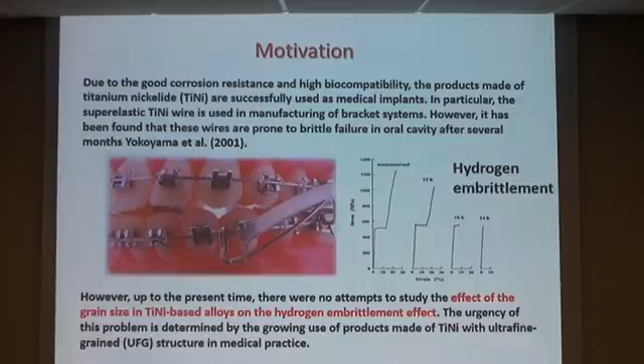However, up to present time, there were no attempts to study the effect of grain size in titanium nickelide-based alloys on hydrogen embrittlement effect. This work is to investigate the effect of hydrogen-induced fracture of titanium nickelide-based alloy.

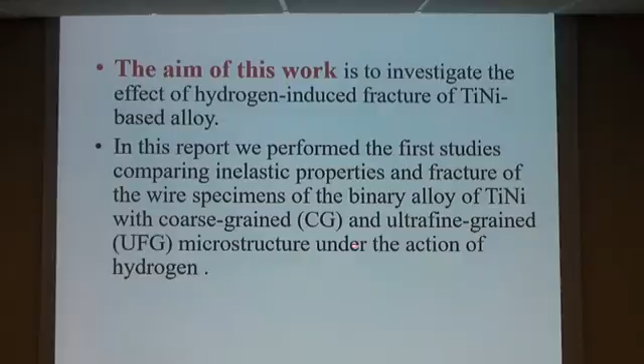In this report we performed first studies comparing inelastic properties and fracture of wire specimens of binary alloy of titanium nickelide with coarse grain and ultrafine grain microstructure under action of hydrogen.

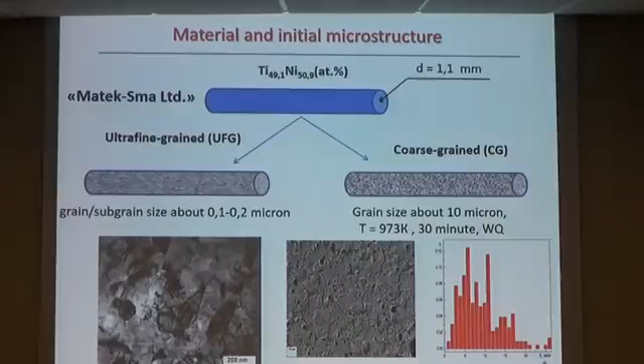Two types of specimens produced by Matek company, composition with ultrafine grain structure with grain/subgrain size about 0.1 micron shown in the microstructure, and coarse grain specimens with grain size about 10 microns, after recrystallized annealing.

Specimens have been charged electrolytically with hydrogen in 0.9% sodium chloride solution, current density applied, charge time was 3 hours. Hydrogen concentration was measured using hydrogen analyzer LECO.

Inelastic properties were determined in torsion test by cyclic loading and unloading scheme under isothermal condition. Scanning electron microscopy was conducted using Zeiss scanning electron microscope.

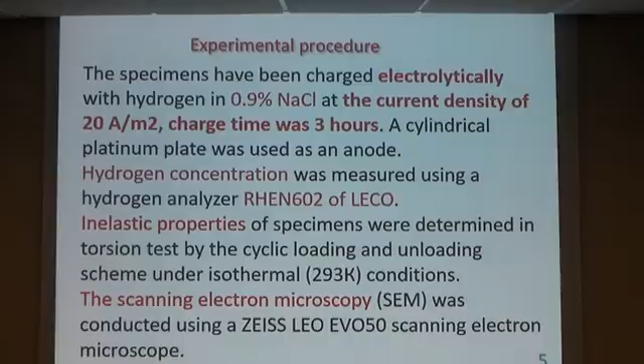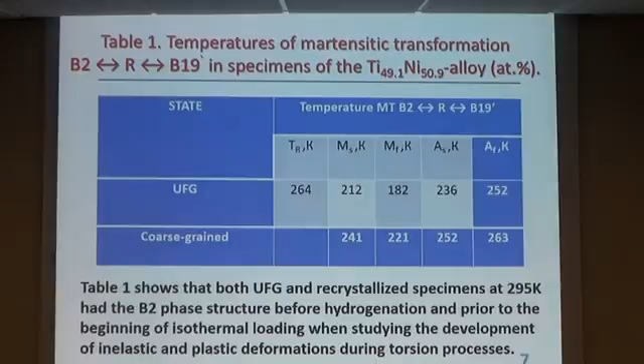Martensitic shear stress about 400 in ultrafine grained and coarse grained specimens. Transition from ultrafine grained structure of specimens to coarse grain results in softening.

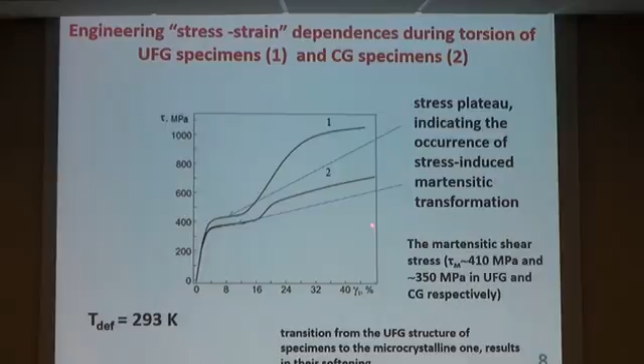Super elastic effect under hydrogen. This is accumulation and recovery of inelastic strain at the first loading-unloading cycle in coarse grain specimens. Testing temperature was room temperature.

After hydrogenization compared to before hydrogenization, the hydrogenated coarse grain specimens achieved the stage of dislocation strengthening earlier as compared to unhydrogenated specimens.

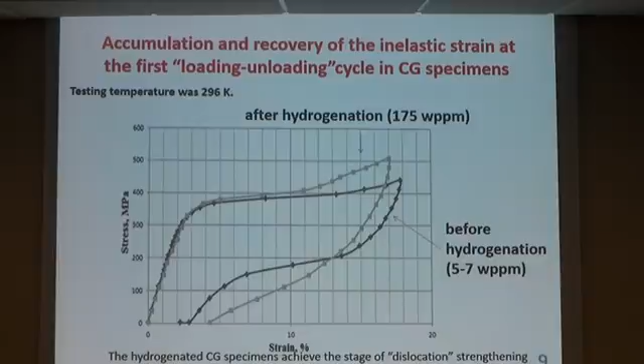It is accumulation and recovery of inelastic strain at first loading-unloading cycle in ultrafine grain specimens. Hydrogen has a weaker effect on the inelastic properties of ultrafine grain specimens than coarse grain specimens.

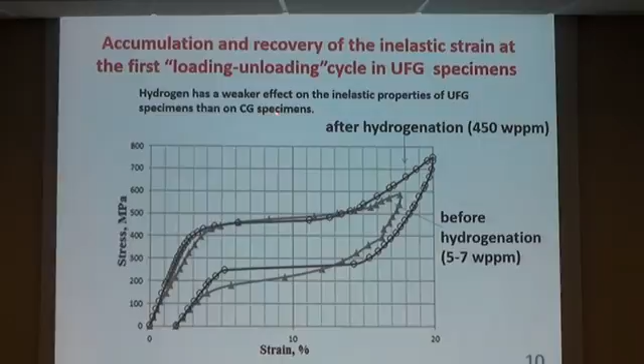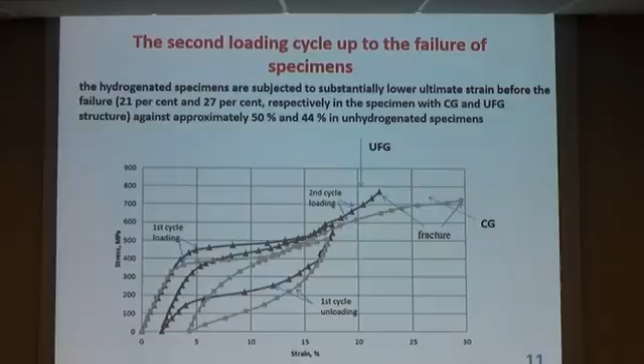Torsion failure. Torsion failures are different from tensile failure. In this case, there is a little localized reduction of area or elongation.

Ductile failure shows a flat surface; brittle failure shows an angled surface.

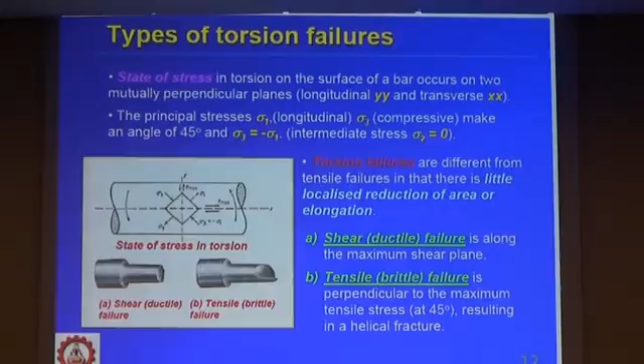Torsional fracture of titanium nickelide wire, without hydrogen. Ductile fracture, flat surface, dimple near center of wire.

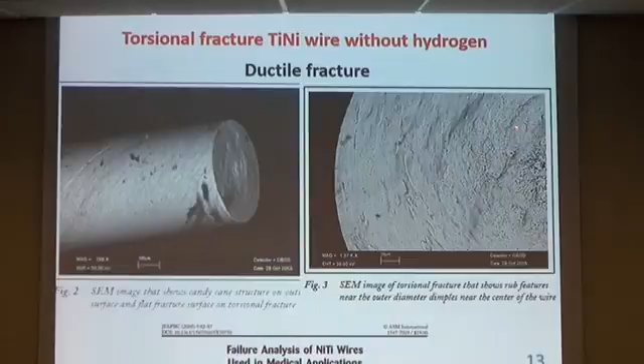It is image of fracture surface of hydrogenated titanium nickelide specimens with coarse grain structure. Brittle fracture, spiral cracks, delta L is the distance between spiral cracks.

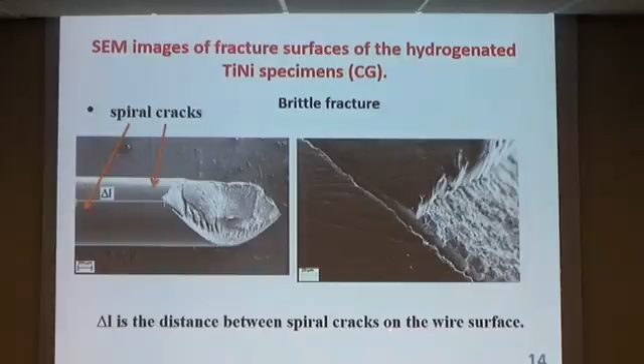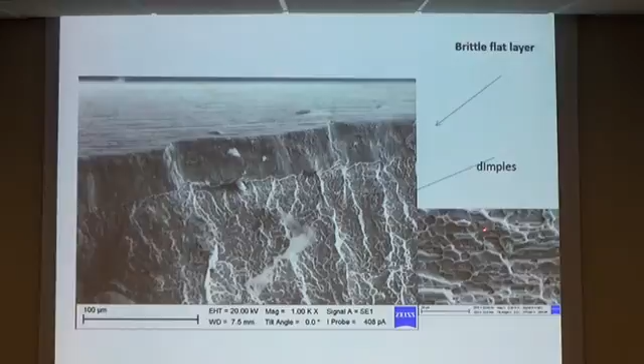It is brittle flat fracture with dimples. Cracks on the surface of fractured hydrogenated recrystallized specimens. Many cracks. Crack width depends on distance of specimens from fracture plane.

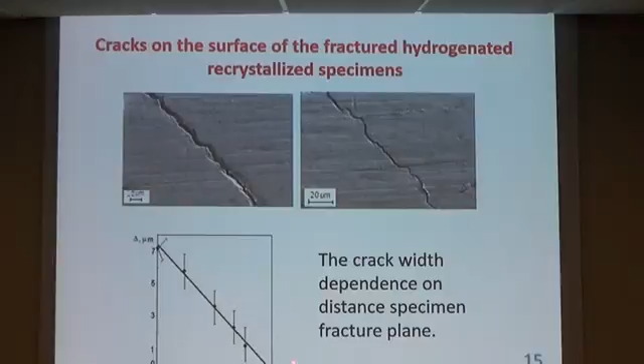It is image of fracture surface of hydrogenated titanium nickelide specimens with ultrafine grain structure. Only one spiral crack, also brittle fracture.

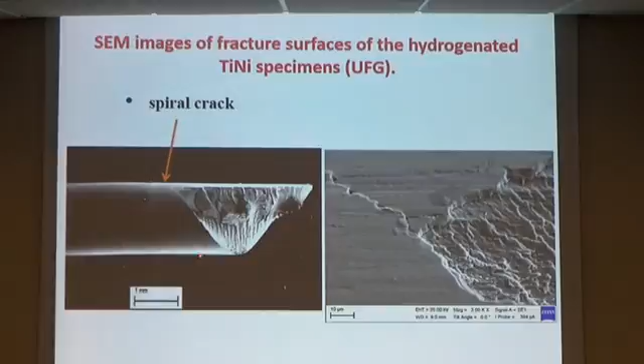In ultrafine grain structure, brittle layer is about 3 microns. In coarse grain structure, brittle layer is about 30 microns.

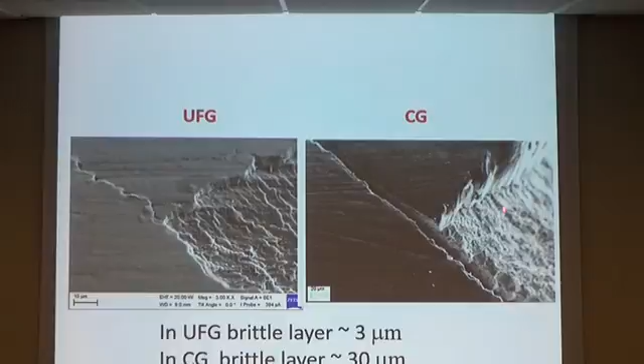600 megapascal. Hydrogen has a weaker effect on the inelastic properties of ultrafine grain than coarse grain specimens.

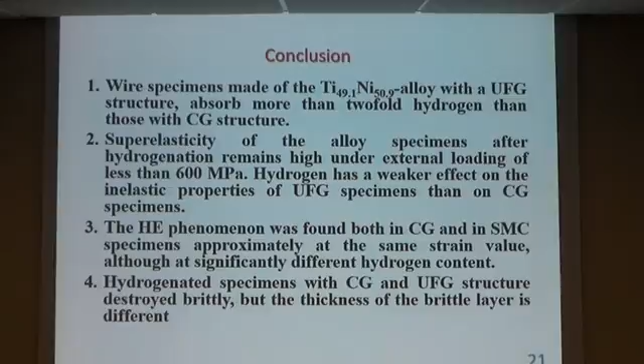Hydrogenated specimens with coarse grain and ultrafine grain structure are destroyed in a brittle manner, but the brittle layer thickness is different. Thank you for attention.